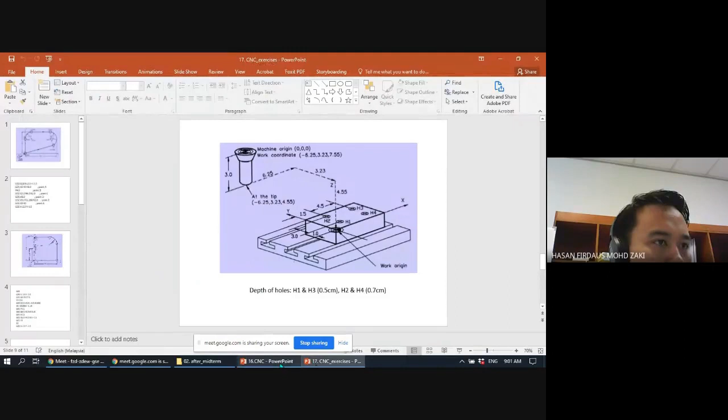Okay, so let's start our class today. Yesterday I posted the introduction to CNC, right? So just a recap of yesterday's video - I started with some introduction of CNC. Why is it called CNC? Because the programming of CNC, or part programming, consists of alphanumerical coding - meaning it's a combination of alphabet and numbers. So those codes denote how the movement of the tool, the tool bit, does your machining.

And as I discussed before, you already saw the CNC in your workshop. Just this one maybe as a refresher, because you did this in your first year, so it's like 2 years ago. Okay, right.

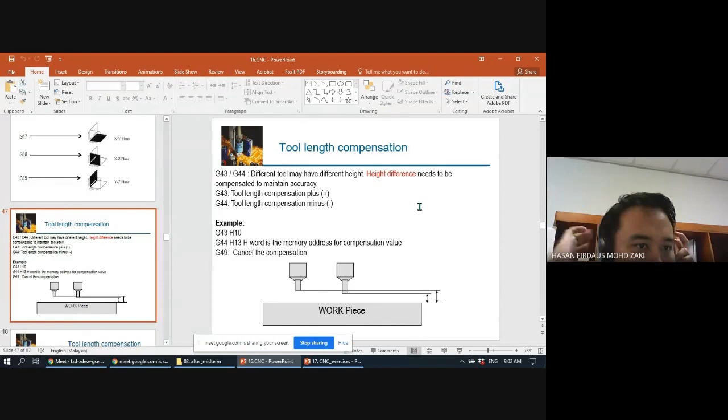So I think I stopped at - can someone tell me where did I stop? Is this one? Maybe this one, right? Have you seen this? I think we stopped at this one, right? So let's start from this slide onwards.

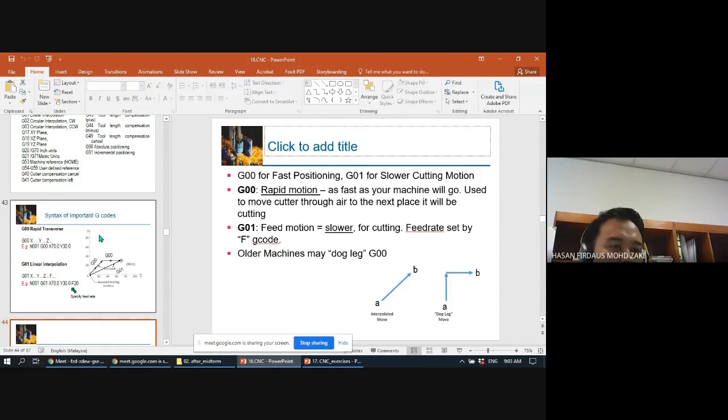I think before that we also discussed the basic movement for CNC - we have G00 and G01. G00 for rapid motion that doesn't need the feed rate. However, for G01, you can specify the feed rate, so this one will go slower. So this one is more used for the milling operation, and G00 for the fast movement.

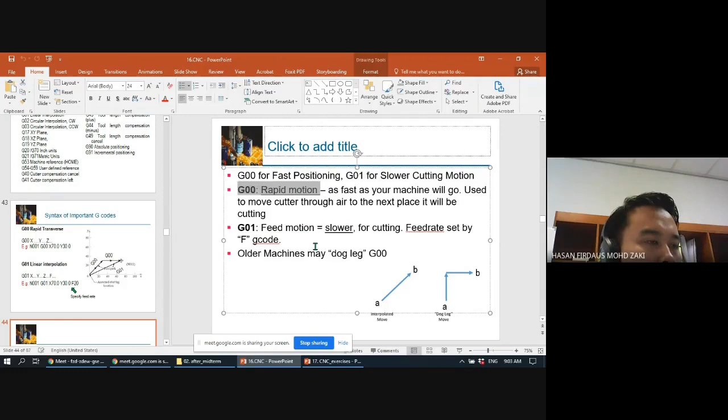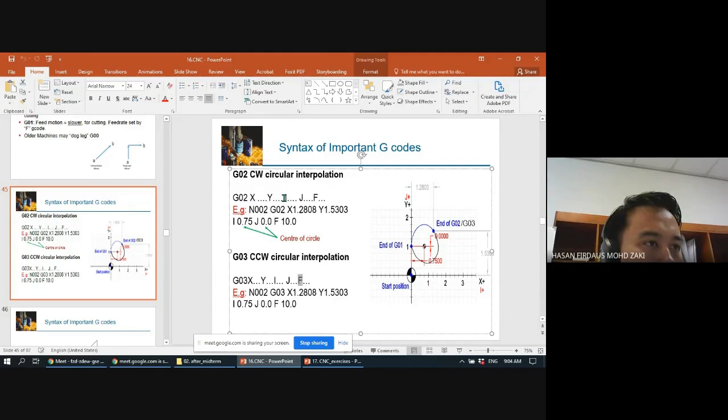All right, and then we also went through the circular motion - G02 and G03. G02 for the clockwise movement, and G03 for the counterclockwise movement. And then of course for these two you also need the feed rate F, and you also need to specify the I, J - I, J is the distance from the center of the circle to the point.

Someone is calling me. Sorry, yeah. So how do I cancel this, or just reject?

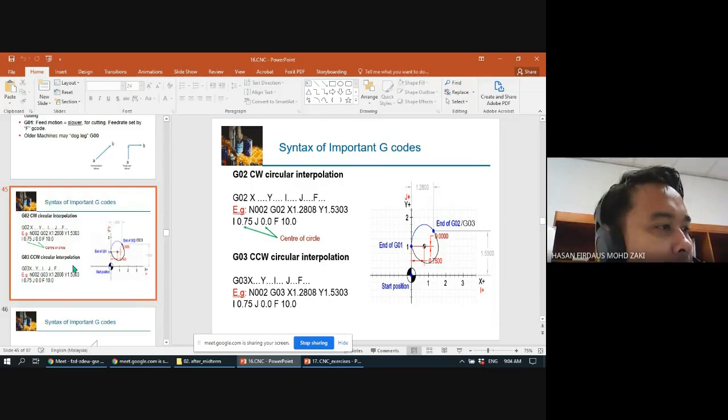Okay, all right, so today inshallah we'll continue with this tool length compensation.

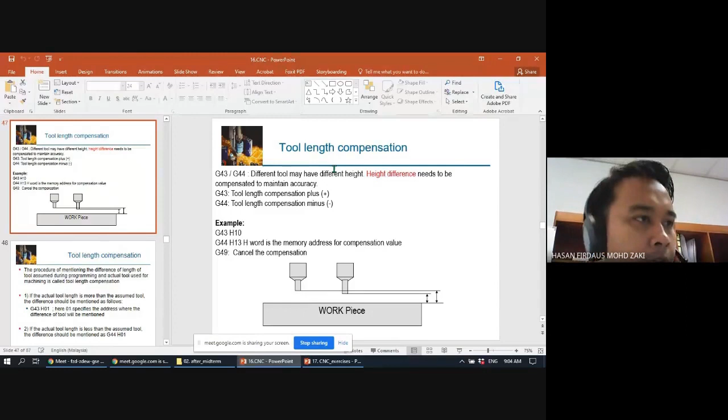All right, so for the tool length, why do we need this tool length compensation? For each CNC machine, we have the reference heights for the tool bit. So for this one, you have G43 and G44. You don't have to worry about the definition of this - this will be given. You just have to understand how to use it. So different tools may have different heights, so the height difference needs to be compensated to maintain accuracy.

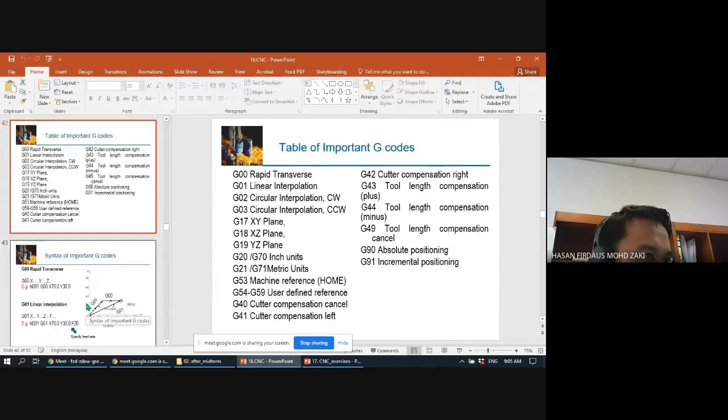Because you have lots of tools that you can choose from, before this we also saw the word T - T for tool selection, right? This one is G - I think we've gone through this before for tool, that this one is T, all right?

So T - some CNC machines have 4 tools, and some have more. So you can choose from those based on your application. So these tools will have different length, different type of tools, right? So you can have tools for milling, tool for drilling. So you can choose this one. Therefore, for each you need to compensate, based on the reference of the tool in your CNC.

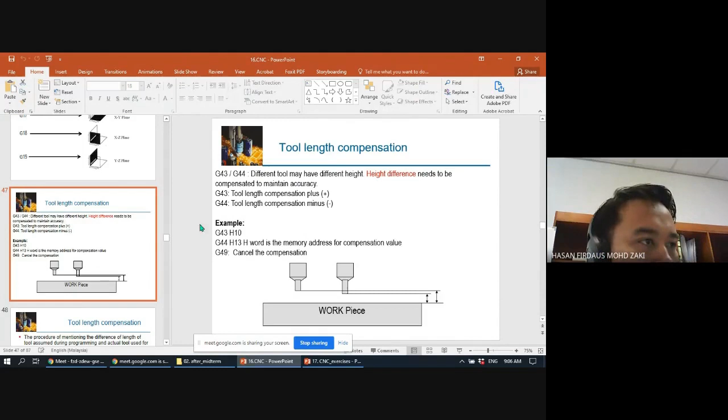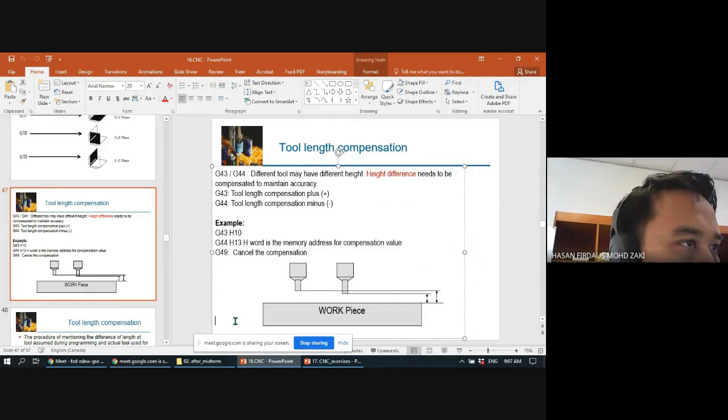For both G43 and G44, this needs to be followed by H. H word is the memory address for the compensation value. You need to give the value here so that it will compensate based on the value you give. After you finish the operation, you can cancel it by giving the command G49 to cancel the compensation.

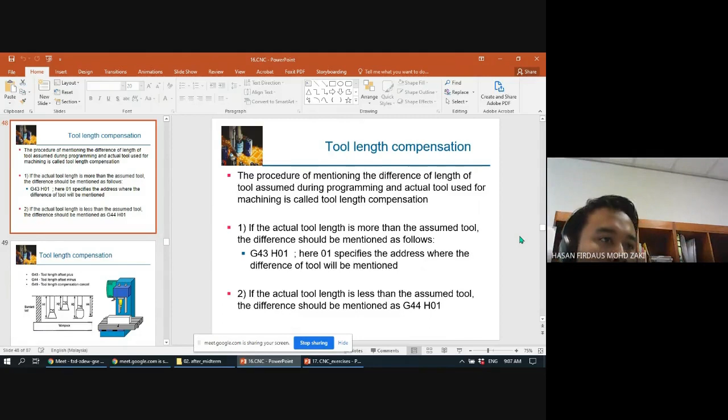The procedure of mentioning the difference of length of tool assumed during programming and actual tool used for machining is called tool length compensation, as I told just now. If the actual tool length is more than the assumed tool, the difference should be mentioned as follows.

You use G43, H, your value. Here 01 specifies the address where the difference of tool will be mentioned. If the actual tool length is less than the assumed tool, the difference should be mentioned as G44. This is just the difference of whether it is shorter or longer than the reference value of the CNC.

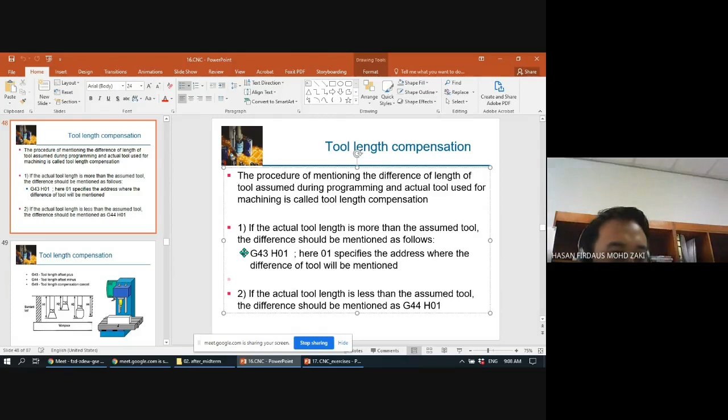So G43 and G44 are for the tool length compensation. G43 is for offset plus, G44 is for offset minus. You have different types of tools with different lengths.

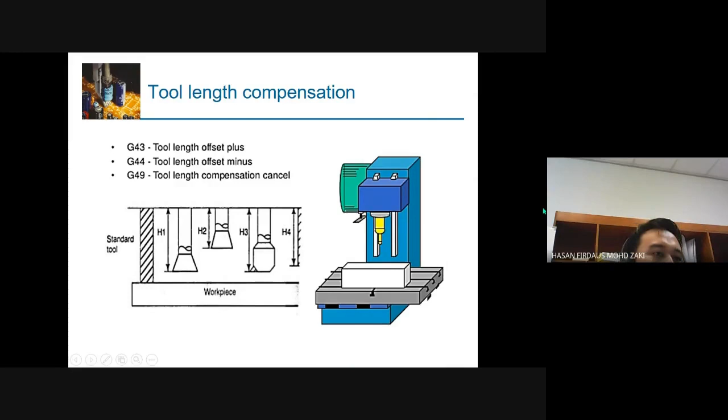This one is the reference point that is just right on top of the workpiece, that we have set in the datum in the last video. So when you change to a new tool, of course this one will have a difference, so you need to compensate that, otherwise you will not cut through your workpiece. That's for the height difference, compensation for the tool height.

Next you have the compensation for the tool diameter. Different tools may have different diameters. For example, for milling, if you want to cut quickly, you use a tool that is bigger. If you go for more accuracy, you may opt for one with a smaller diameter. So this one you also need to compensate.

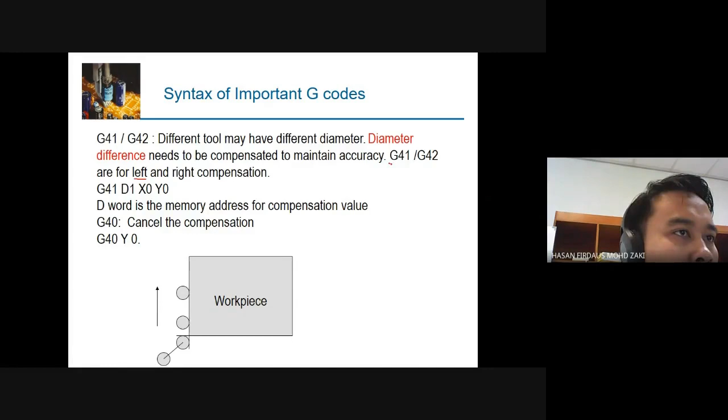This one can be called by G41 and G42. Diameter difference needs to be compensated to maintain accuracy. G41 is for the left compensation, and G42 is for the right compensation. What is left and what is right, we'll see after this.

So how to call it? You give G41 like this, G41 and the diameter of your tool. Let's say your diameter is 1, so you give D1. This is based on the metric that you have defined earlier.

In the last class, we talked about specifying the metric, whether you want to use metric or inches. If you use metric, say 1 millimeter or 1 centimeter based on that CNC, you just specify your diameter. So this is the example of D1, it can also be D5, D10, and so on.

And then, of course, this is the next position you want to move to. For example, you want to go to the reference point of the workpiece, you go to 0,0 here. So from here, you want to go to the second point.

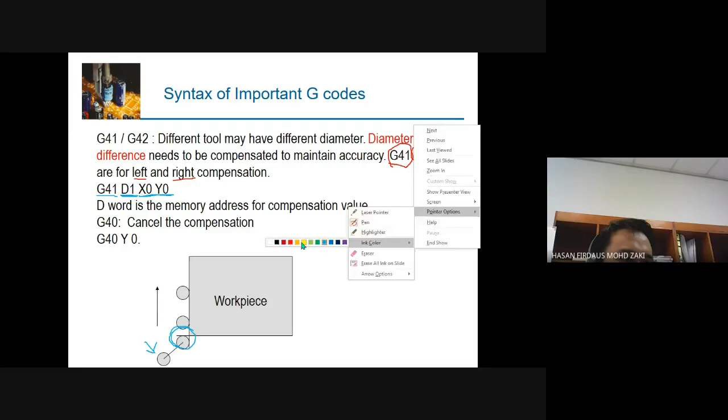What if you don't specify the compensation? Let's say instead of this you use G00 directly, so you use G00 X0 Y0, instead of using G41.

What will happen? Instead, it will go here exactly, the center of your tool will be at 0,0, can you see? Therefore this will eat into some of your workpiece. Let's say if the next move is towards this point, you will eat like this, so this part will be removed. You don't want it to be like that, therefore you need to make some compensation for this.

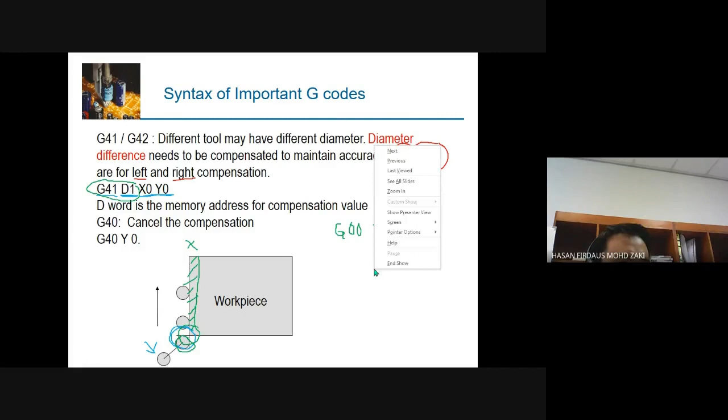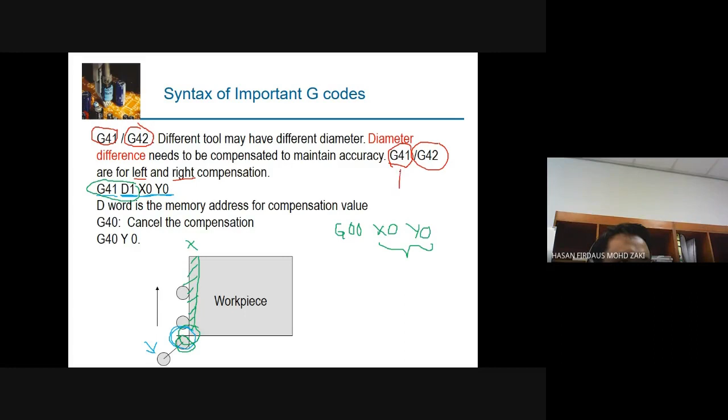So the question is which one do you want to use, G41 or G42? As I told you, G41 is for left compensation, G42 is for right compensation. What is left and what is right? This is based on your tool path.

For example, if you want to cut this workpiece in this rectangular shape, let's say you want to go in this direction with this arrow. So you need to go to the left of this workpiece, so this one will go like this.

What if you go for right compensation for this tool path? This tool will go here, and therefore it will eat all of this, instead of eating here.

So be careful with your choice of compensation, whether it's left or right. If you opt for this tool path, here with this arrow, you need to go to the left. Otherwise, if you go for...

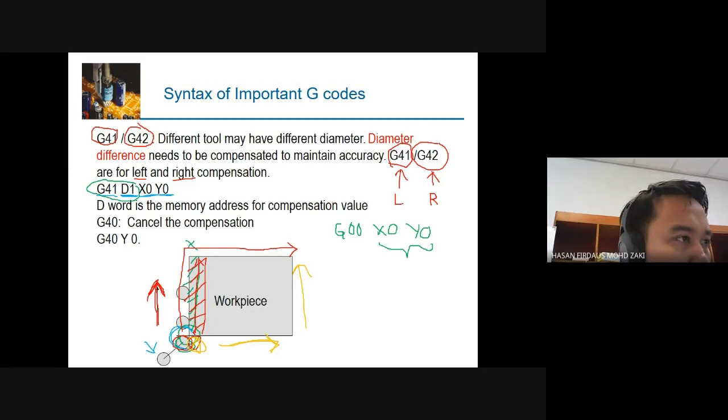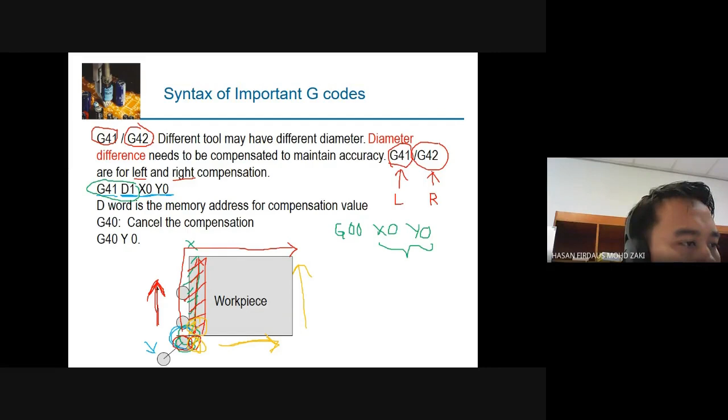What if you choose for this tool path but select left compensation? Instead of going this way, it will go to the left, into the workpiece, and cut through some of your workpiece like this. So you don't want that, you need to compensate to the right.

I hope this makes sense. So in summary, I think you can say that if you go for clockwise movement, you go for left compensation. If you go for counterclockwise, you go for right compensation. That's how you can make more sense of that.

If you have done with that move, of course from this 0,0, then you go here, for example. So you go for, let's say, G01 X10 Y10 coordinate, or G01 X0 Y10, and then you specify the feed rate.

But of course this compensation will continue. It will memorize your compensation until you invoke G40 to cancel the compensation. When this is cancelled, it will go to the center again without left or right compensation.

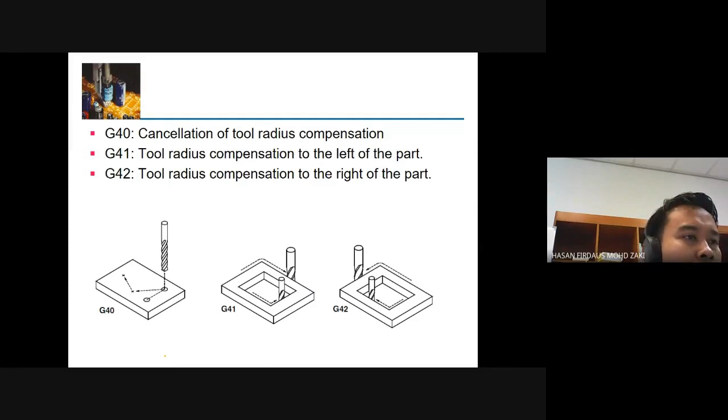So this is just an example of G40, G41, G42. That's for the G codes, some of the important G codes that we can see.

So next is the M codes. M code is not very difficult because this is just something to do with machines. For example, M00 is program stop, M01 is optional program stop, when the optional stop button is pressed. Normally we use this M01 in real applications.

M02 is program end. M03 is spindle on clockwise, M04 is spindle on counterclockwise. Of course, if you use either of these, you need to specify the speed of the spindle, the rotational speed, given as normal. So whether it's M03 or M04, you need to specify the speed.

And then spindle stop, so after you finish cutting, you need to stop this. And then if you want to change the tool, M06 followed by T, which tool do you want to choose now. So maybe in the first operation you cut some geometry using tool number 1.

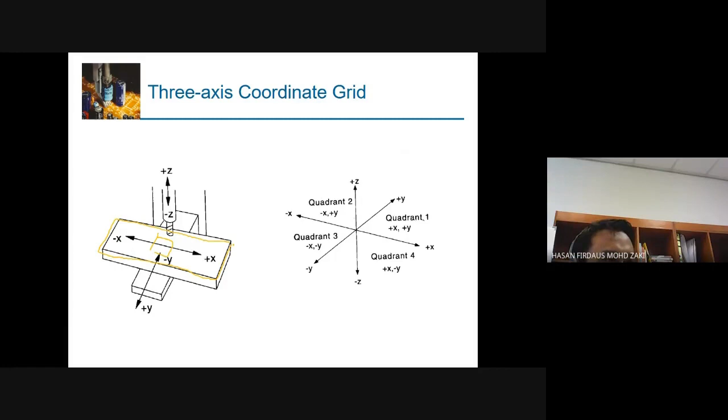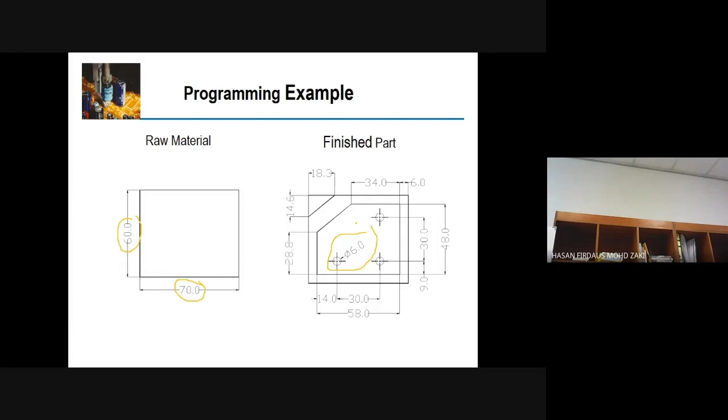Let me take some water. Sorry. There's people coming in. Sorry.

So if you have questions, you can ask now, while I am drinking.

Okay, all right, so we continue with this example. Let's say we have this raw material, and then this one is the finished part. This is the end product that we want to machine, based on this. What is the depth? We don't know the depth. Doesn't matter, we'll see after this.

All right, so this is the example. So this type of example, CNC code or part programming that you need to do for this one. Let's see one by one. So this one consists of 2 programs. Why? Because we need to change the tools. So this first one we use tool number 1, the second one we use tool number 2. So of course number 1 is for the milling, the second one is for the drilling.

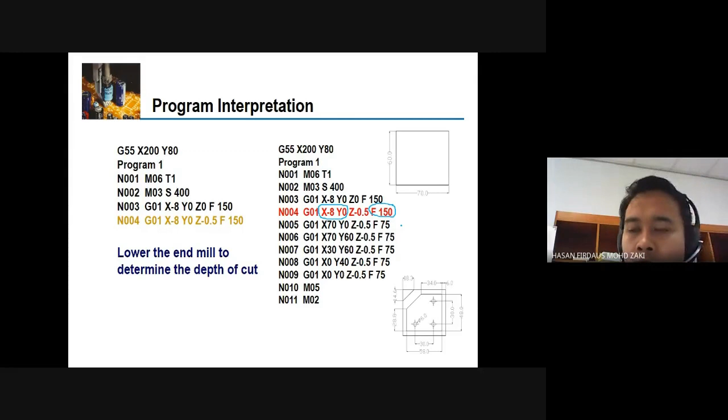But this one is a good practice, all right, good practice, so you don't have to see again the previous one, right? But of course this one will be messy if you have very long programming.

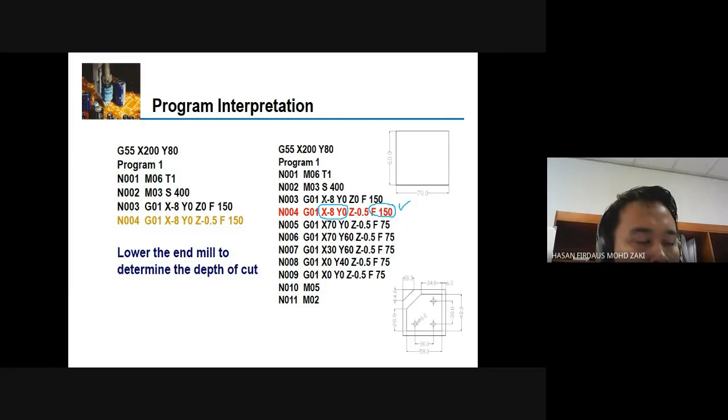Okay, so this one, it goes down, right? So preparing for the cutting, all right? And then...

N005, G01, X70. Where is X70? So go to this point at the end of this, okay? X70, Y0, right? So this one is the same.

So this one you can omit again, since it's the same. But of course, F you need to put there because you use a different value.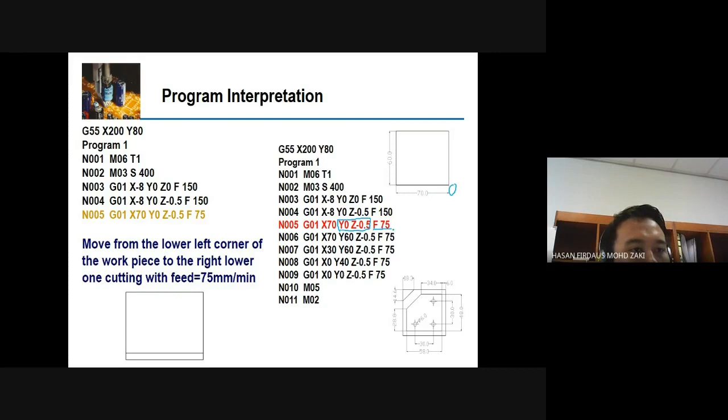Okay, so G01 X70, so you go to here, F75, okay, with this feed 75 millimeter per minute.

All right, the next one, N6, right? G01 X70 Y60. So you can see this is the difference there, it goes up, right? So now it's here, Y60. Z, this one is the same. Feed rate is the same.

Okay, easy, all right. And then X30, all right, Y the same. So meaning that from here, you go to X30, so somewhere here, okay, you can see like this. This is the one, okay, up to that point.

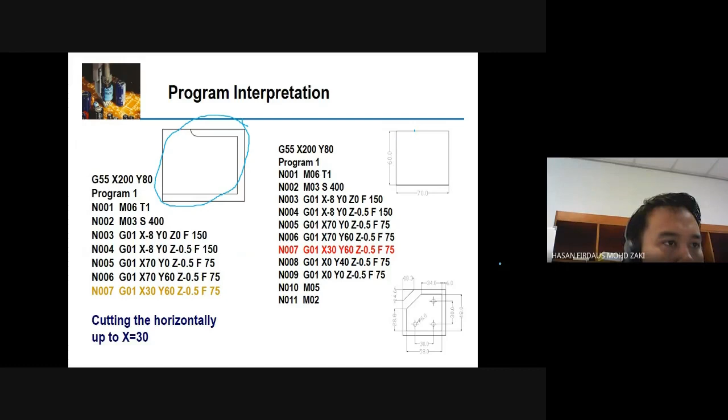And then, okay, and then go to here, right, so this one right now I want to go like this interpolation. Okay, so you go to X0 Y40 like this, okay, and then finally we'll go back to here, all right, with the feed rate.

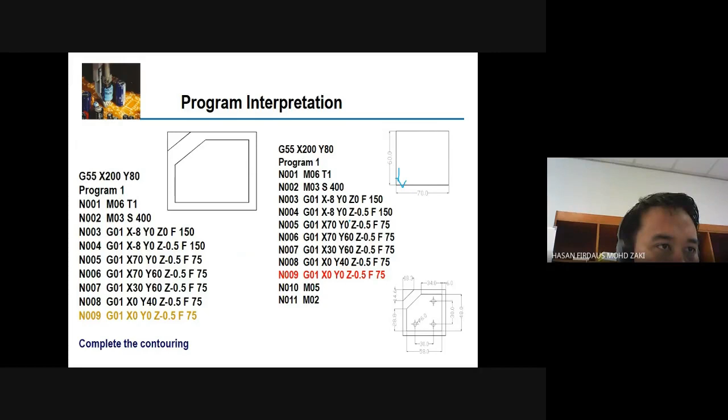So you can see that this one is all the same, okay, this one is all the same, right? So you can actually omit them, okay, and then lastly, spindle off and end program.

Okay, all right, so if you see here, this one actually omits lots of things that are actually important for our program. So for example, if you do your part programming, I always want to see you start with...

So before you start here, all right, you need to specify whether you want to use absolute or incremental. This one is very important, right? In the last class, we've already discussed the absolute or incremental. So like for this example, we use the absolute positioning, so this one you need to specify. So absolute, I think G90, right? So you can go back to see, right, G90. If you use the incremental, you need to use G91, if I'm not mistaken.

Okay, this one will be given... no, doesn't matter, your final exam will be open book, so you can know what is the code for absolute positioning, right? So absolute, we start with defining this absolute positioning G90, and then I also want to see whether you want to use the metric or the inches. Okay, so for this example, you use the... I think G21, if I'm not mistaken, so you can go back, right, G21 for the metric. Okay, so millimeter is the metric, right? Okay, all right, so what else?

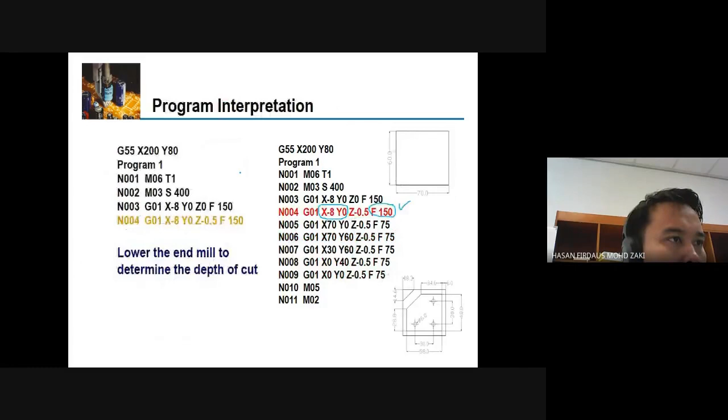Okay, so for example here in this example, we go to the first one first to see the raw material. Okay, so this one is 70.

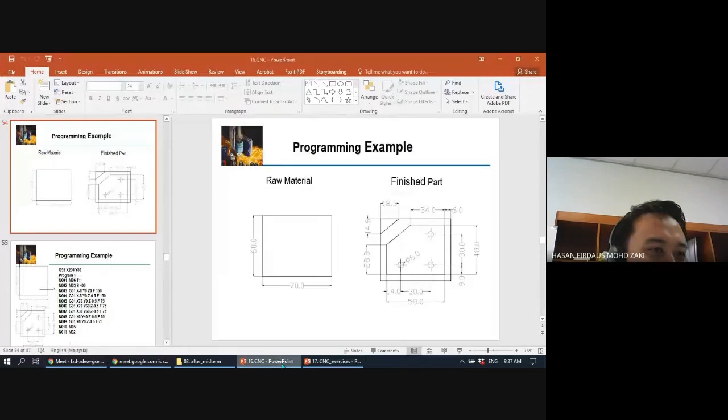Can someone calculate for me? Is this one 70? Is this one 60? Someone? Very lazy too. Someone, give some message. Yes, okay, right. Thank you for calculating for me.

So if you want to do the diameter, tool diameter compensation, right? For this one, do you go for right compensation or left compensation? Which one? Because right now you are going for this path, right? So which one? Which one do you want to compensate?

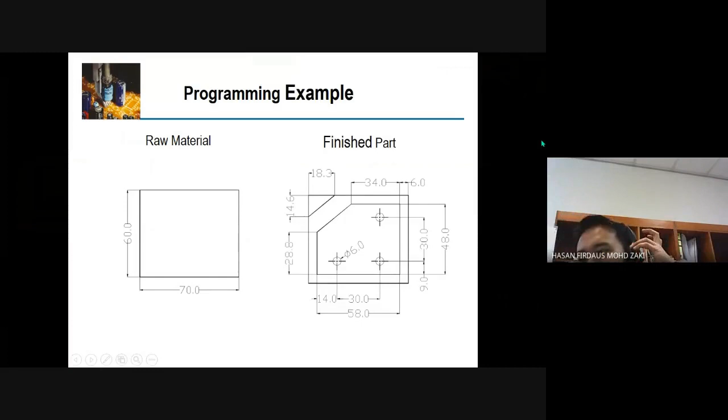Okay, someone is right. The one I leave for you to think about. But this one you need to. But this example, the example didn't give us the tool diameter. But if it's given, you need to do the compensation.

So go back to program one, right? And program, okay. So like I told just now, here, this one you need to specify the absolute or incremental.

So if it's absolute, G90, and then you need to specify metric or inches, so G21 if I'm not mistaken, and then the tool compensation. So you start here, you can directly go to compensation here, if I'm not mistaken.

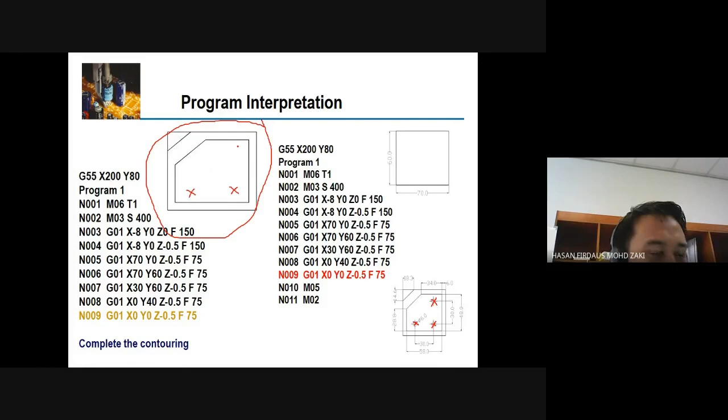drilling. So let's say we have cut the workpiece like this, and then you need to do these holes, cut this hole like this here. So you change the tool now. Why? Because of course the hole will have a different diameter. So the diameter is 6mm.

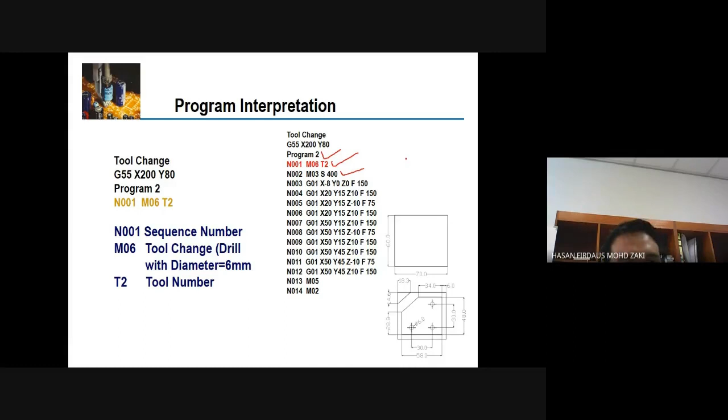Program 2. You go one by one. Oh, this one is already one by one. You specify program number, and then you change the tool. Like before, you start the motor, start the spindle with the speed of 400 rpm, and then you go to the first. Let's say this one is also safety, right? Just go to safety, and then N004, G01,

X20, Y15, and Z10. You see here how this one goes. So let's say this one is your workpiece. This one, if this one is from top, right? This one is from top view, top. So this one is from front view, front view. So how does this one go?

So let's say this one, N003, go to X-8. So somewhere here, right? Your tool will be somewhere here. So this one is 8mm.

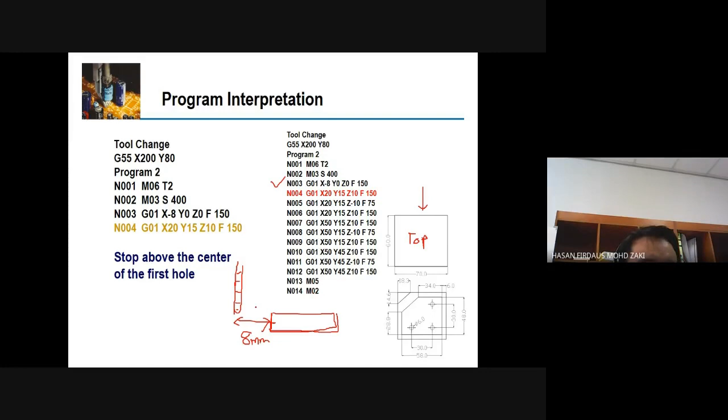So if you go to N004, G01, X20, Y15, and Z10, right? So it will be going like here, right? So it will be here now, right? So this one is 10, right? From the top view, from the front view. So from the top it will be here, right? At just on top of the first hole.

Yet to drill, yet to drill. So you go to this one first, right? And then what do you do next? You go to Z-10, and then you specify the feed rate. So this one you go to drill, with the depth of -10, right? So suppose this example should give you the depth that you need to go, right? You need to drill, right? Is it the go-through, see-through drilling or not, right? So this one should be given.

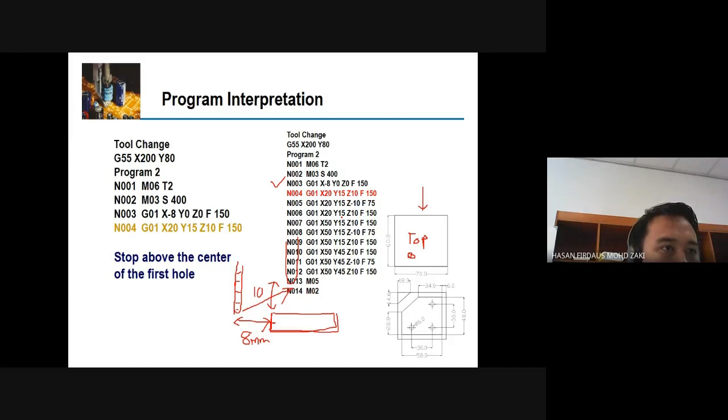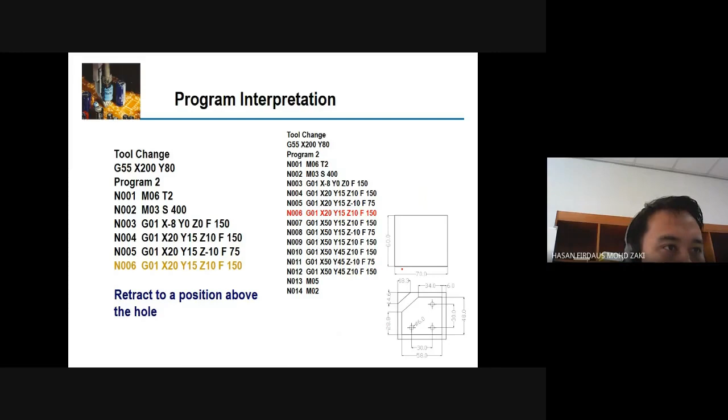From this program, you can see that it goes to a depth of -10. Okay? And then what does he do? Go to retract, right? So drill Z10 retract, just on top of the hole. And then what do you do? Go to the next one, X50 here, right?

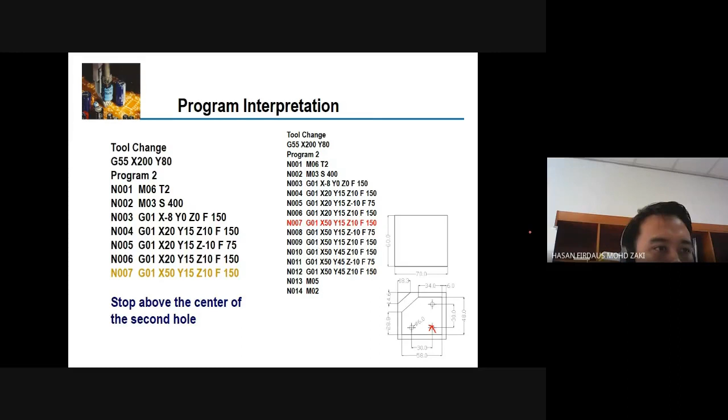X50, okay, and then drill again. Drill the second hole, right? And then retract, go to the next one, Y45, X50, to this one, the third hole. And then drill again, and then what do you do? And then you retract to the position above the third hole, and then you stop.

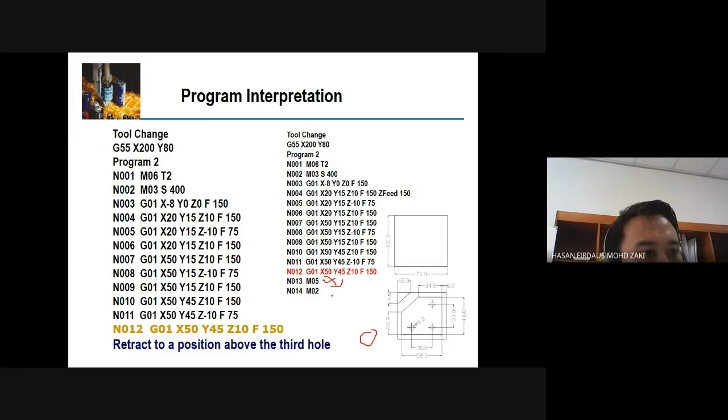So instead of this, maybe you can go to safety again. You go to somewhere here, so that you can easily remove your workpiece afterwards. Maybe because you have retract, so you go for G00, G00 X-8 Y-2 for example, so somewhere here, just for the safety reason. And then you end your program, stop the spindle and end the program.

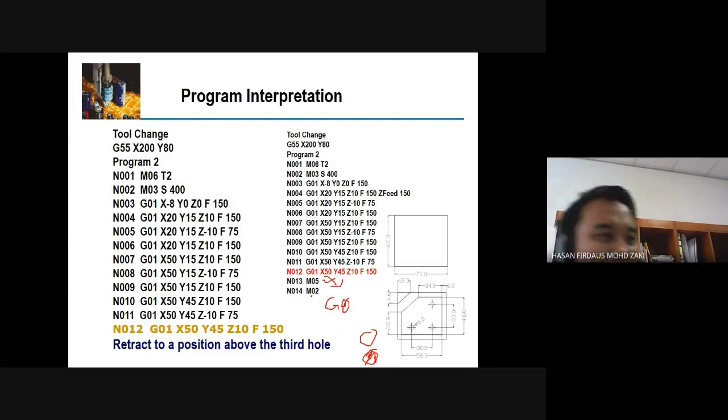That's all, right? Is that easy or too easy? Okay, too easy, too easy, CNC. All right, so spindle off and end program.

So do you have any question to us before we go to the next exercise? Sir, yes - meaning the Z -10, the depth is 10 millimeter into the hole, right?

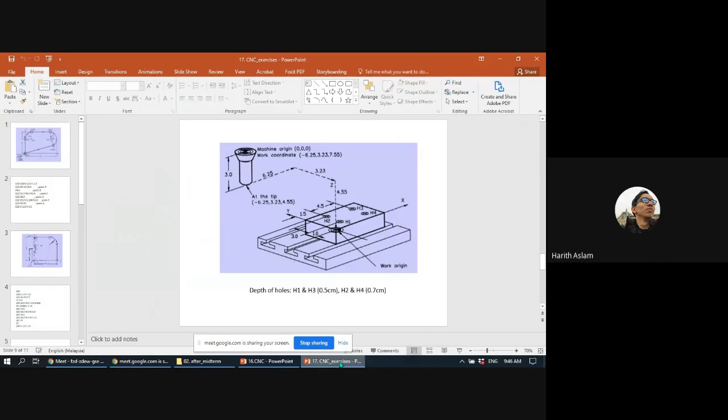Into the hole, yeah. So the datum is at the, let's say this one is your workpiece. Can you see? Let me... okay, oh, I cannot see my face. Can you see this? Yes. All right, so let's say you have the datum here. So this is your tool now here. So this is your 000.

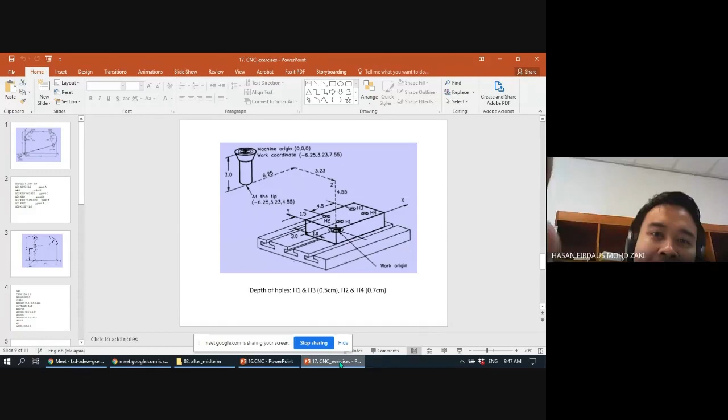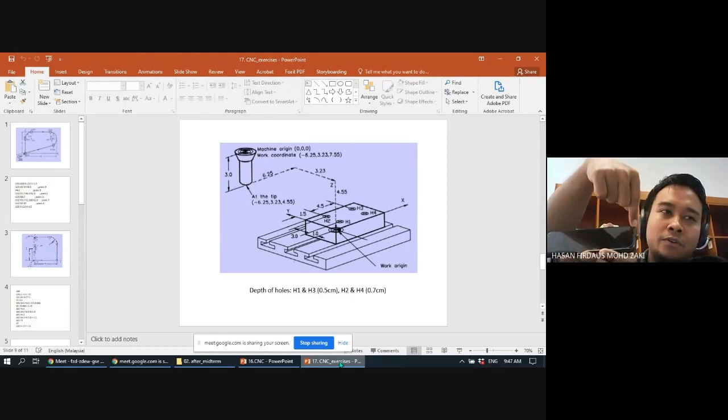Okay, can you see now? Yeah, I guess. All right. So this is your datum at the very end, bottom left corner, but on top of the workpiece. So that must be Z0, right? Z0, so this one is 000, X0, Y0, Z0. So if you go -10, it will go through the workpiece.

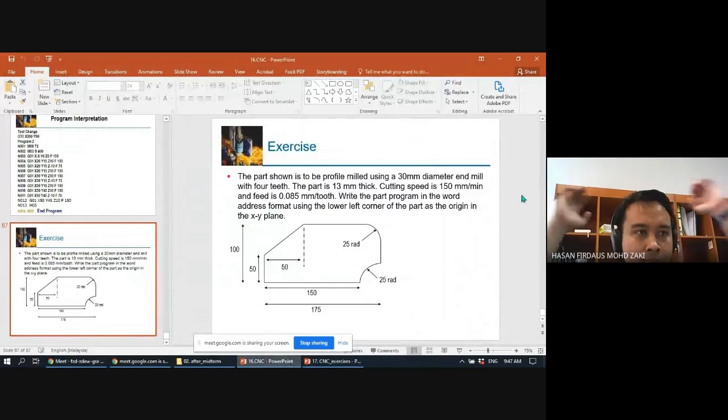Okay, thank you sir. Right, so that's the thing. Do you have any more question? So let me check first. No question, right. So if no question, we go to the next exercise, inshallah. So this one, I think we stop with this exercise.

Okay, no worry. The part shown is to be profile mill, profile milling, using a 30 millimeter diameter end mill with 4 teeth. The part is 13 millimeter thick. So this one is a top view.

So you can imagine if in isometric view, cutting speed is 150 millimeter per minute, and feed is 0.085 millimeter per tooth.

Write the part program in the word address format using the lower left corner of the part as the origin in the XY plane. So this one, of course, you don't know the datum of your actual CNC, so maybe you don't have to put the G55. If it is given, you need to start with G55.

Right, so maybe give you some 1 minute maybe to try for yourself first. This one, so you can go in this direction or in this direction, up to you. That's the best part of industrial automation - you don't have one solution fits all. You have multiple solutions to one problem. Give you 1 minute to see through this, and then we try to solve together.

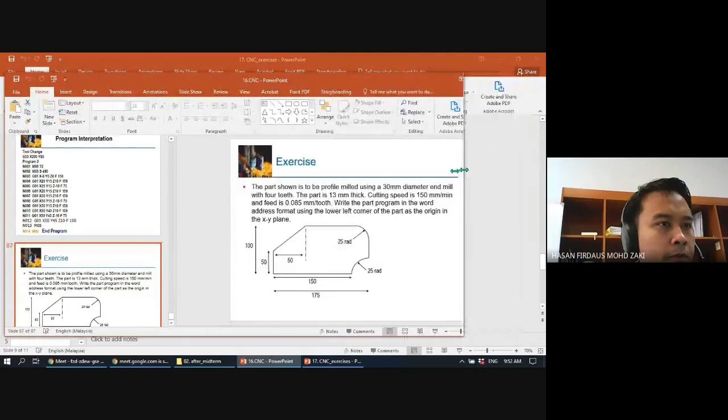Okay, can we start now? Right, so all right, so this one, how can we do this easily? So maybe we put like this. Can we?

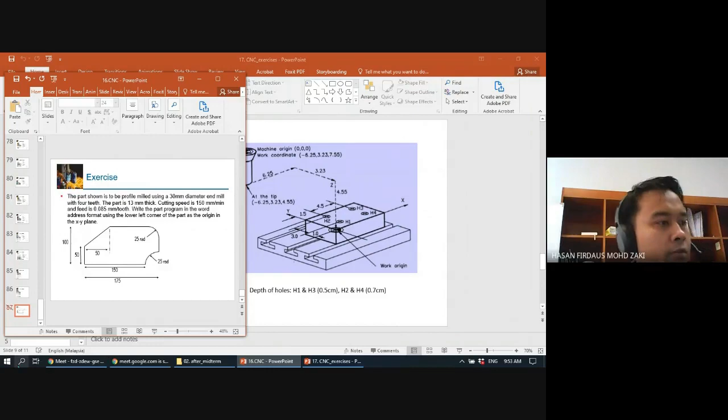Okay, so maybe another notepad or something. Okay. Okay, how to start this?

Right, so as I told you, if you are given the reference, you need to start with this - X and Y. So because this one is not given, so you don't have to put that one. So how do you start? Okay, so this one you start as I told you before. So maybe you start with program.

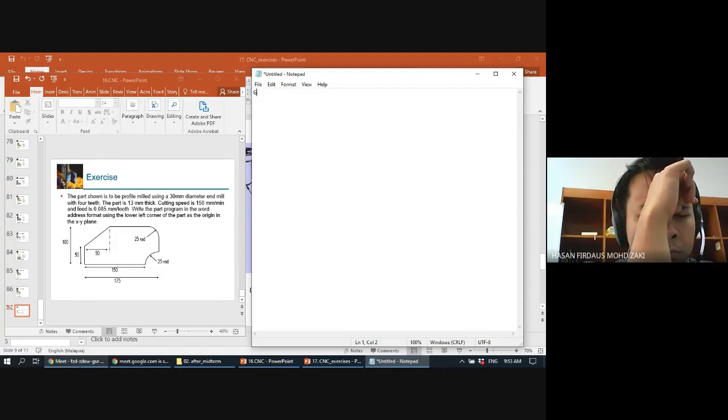Okay, program one. This one is if you don't start with this, I'm okay. So start with maybe specify if you want to use the absolute or incremental positioning, based on your questions. So start with N, maybe N005 for example, G90, because this one is in millimeter, right?

G90, and then this one is absolute, so this one G21. Okay, and then what do you need to do?

Okay, so I think we can start with some, go to safety something. So G00, x minus 10, for example, y minus 10. Okay.

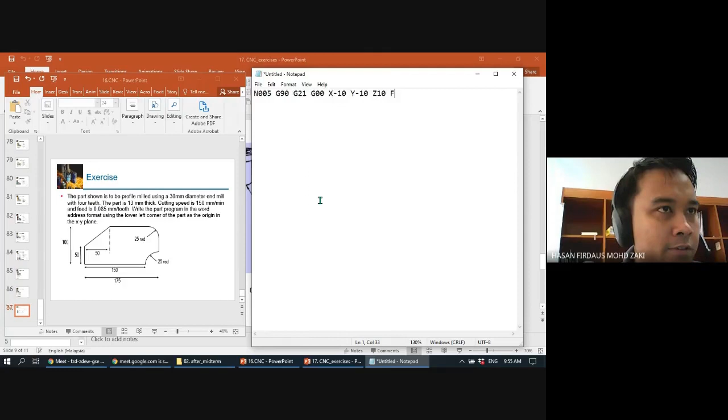All right, so maybe z something 10, because you want to go to a very safety place, right? So G00, do we need to put f here? Okay, no, right? Because it is a rapid move, go to safety, and then the next one, what do you need to do?

What do you need to do? You want to start the motor, right? You can start the motor now, right? So

M03, M03 speed. So what is the speed? 150, right? 150. So you start the motor. This one is in safety. So next one, 15, for example.

And then I think you can start to go to this point. Okay, go to this point. So G00. Right. So before that, I think you need to go down first, right? Go down. Okay. How to go down?

Yeah, because when you go here, you want to directly cut, right? So instead of going from top, you go from the side. Okay, maybe here you can already go to maybe minus, what's the thickness? 13, right?

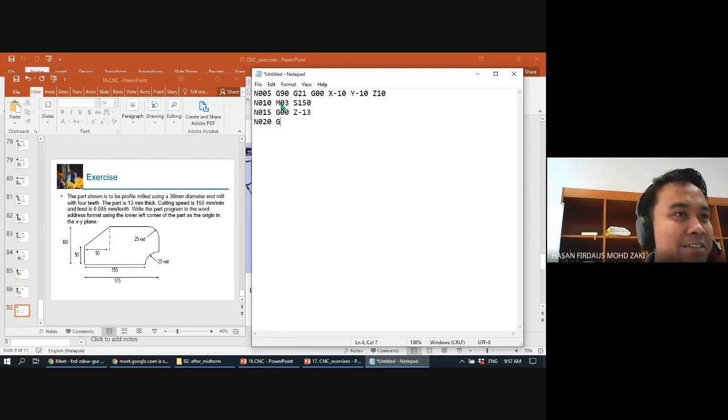Okay. Go down and then go down, go to the 00, right? So let's say we put the caps lock. Okay, so G01, 00. So x 0, y 0.

Oh, this one we need to make some compensation, right? So you want to go clockwise or counterclockwise? Clockwise here. Okay, so let's say you want to go here, right? Oh, you already 10. Okay, you go faster. All right, so of course this one needs some, go to the compensation.

So if you want to go counterclockwise, it is G41, G42, G43. Okay, let me see my example. Okay, I think let's put it 42, right? So 42 meaning that it will go to 00 with compensation.

And of course after that you need to put the feed rate. What is your feed rate? Let's say 0.085. Okay, this, and then next.

Okay, you cut through them. Okay, so and then you go to thing G01 X150, for example. Go to that point, and then okay.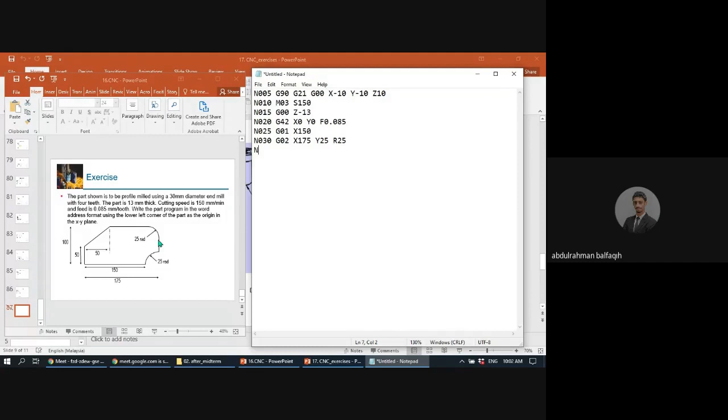Here, right? How can I know that is counterclockwise or clockwise? That's interesting. So this one is clockwise, right? So what if you choose counterclockwise? Let's say you choose G03 counterclockwise. What will happen to this?

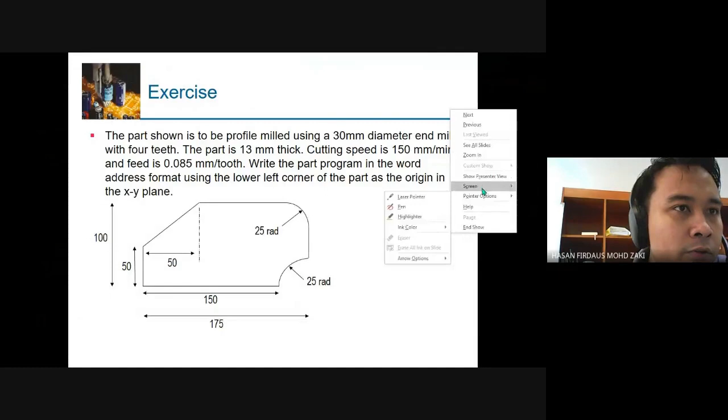So this one is clockwise. Okay, what is counterclockwise? From here, from this point to this point. If you choose counterclockwise, how does it go? Go below, like this, right? Yeah, up there, so it's already wrong. So instead of going like this, we will go like this, which is not the one we are looking for.

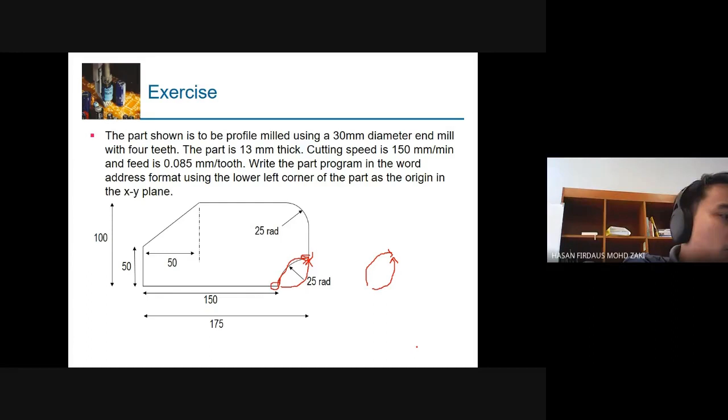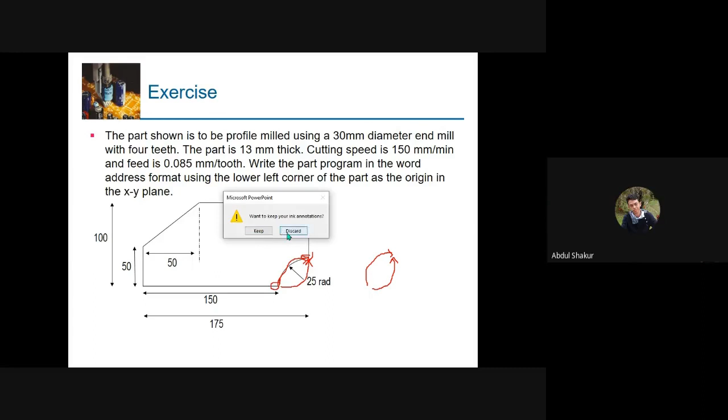Okay, so next we are looking for this point. What is this point? 50, sir. 50, here. Because 100 minus 25 minus 25. Yes sir, 50. Confirm? Yes, yes, sir.

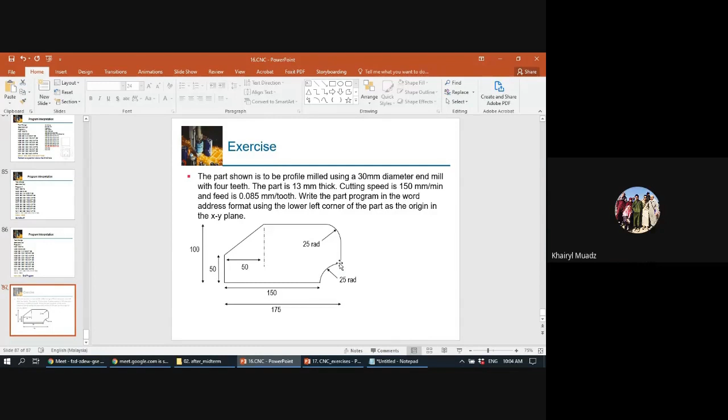Why 50? 100 minus 25 minus 25, the below is also 25. The right means 25, 25, plus 50, right? Plus 50 from 25, so 50 from 75. Here to here, 50. So 75, right? So 25 to 50, so you need 175.

Yeah, 175 is the X, right? So let's say G01 X175. This one, if you want to omit, is already okay because it's the same X, right? So Y is 75, right? Yes, I think so. You can check again.

So G01, you can specify the F or not, up to you because you have already specified. And then what else? You go to this one, another circular motion, right? So this one, G02 or G03? G03, sir, right? Because it is counterclockwise.

Okay, G03. What's the next point here? X 150. Yep, 150. Y 100. Yes, 100. And R25, like that. Okay, right.

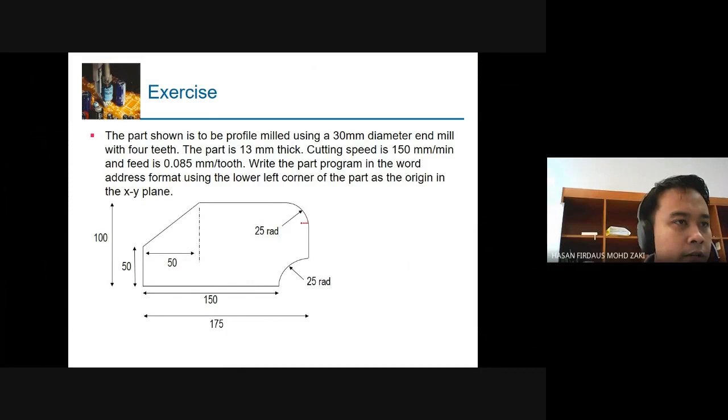So what if we choose G02? Simply you will go clockwise instead of counterclockwise, like this. So this is not what we are looking for. We want something like this.

All right, and then next. G01, go to where? Here, right? So X, what is the X? 50, yeah, 50. Y is the same, so you don't need to specify.

This one, G01, X50, right? X50 and Y0, right? Y0. X0, Y50, right? Yes, I think so. Okay, all right.

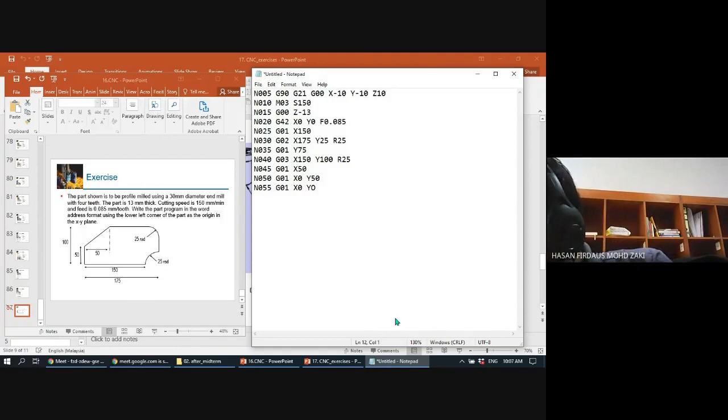And then you go to the datum again. Not datum, the first point. So this one is G01, X0, Y0. Okay, right. So what's next? Okay, so because this one X0 is already X0, you can omit that one.

N060. Because we did the compensation, so we need to cancel. Okay, cancel this one now. G40, right, so maybe you go to some safety points.

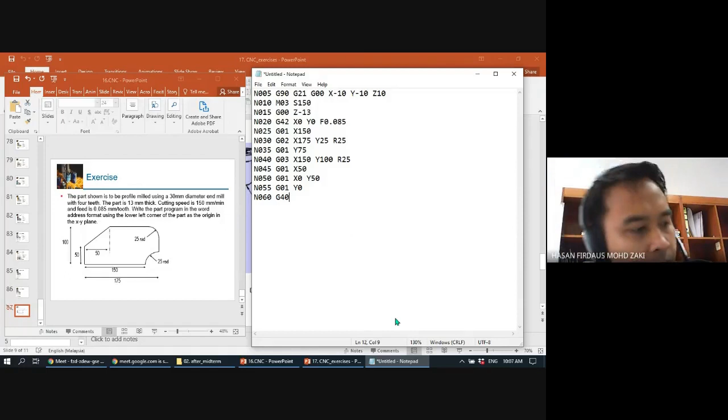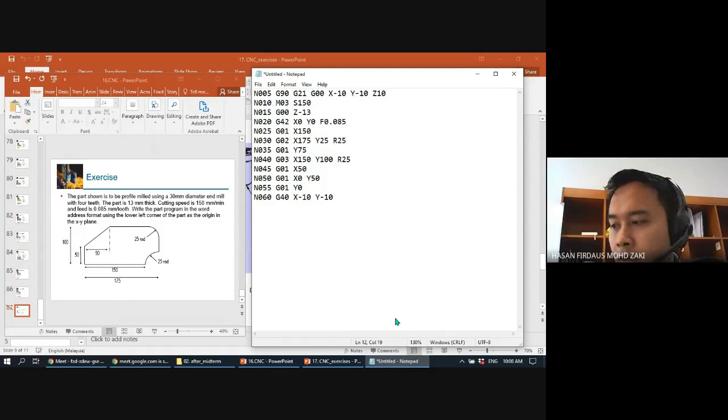So maybe minus 10 X, Y minus 10. Okay, what else? For example, okay, and then you end your program. How to end?

M05. Let's see this. Okay, so this one, and 02, okay, 70, M02, end program. Okay, I think that's all. So maybe you can put M30 as well. What is M30? I think M30 is the end of the program.

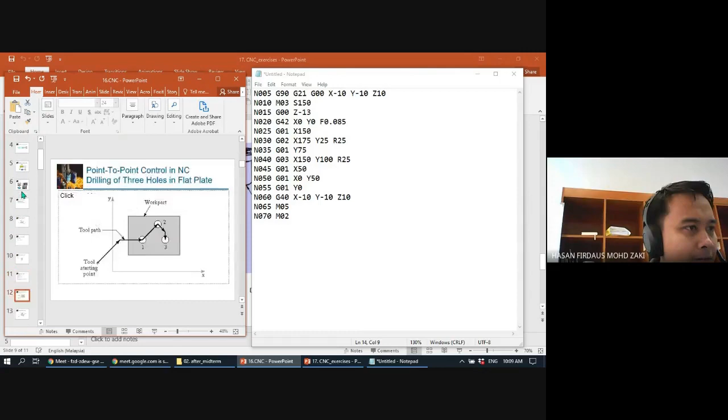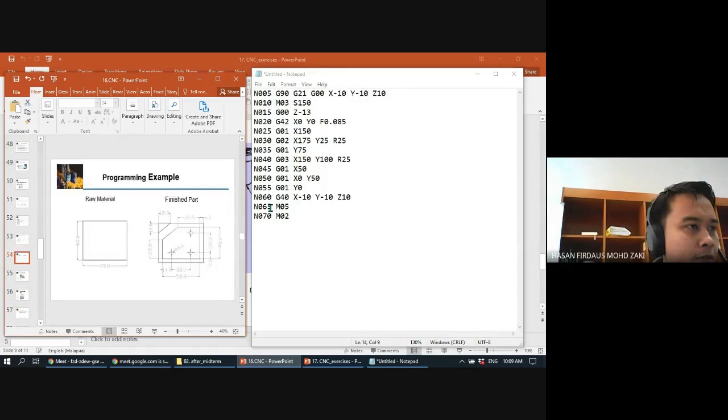Oh, there's none in the first. Yeah. But doesn't matter, this one will be given. Okay, you can choose from this. I didn't include M30. Okay, maybe at the last one is M30 to finish this one.